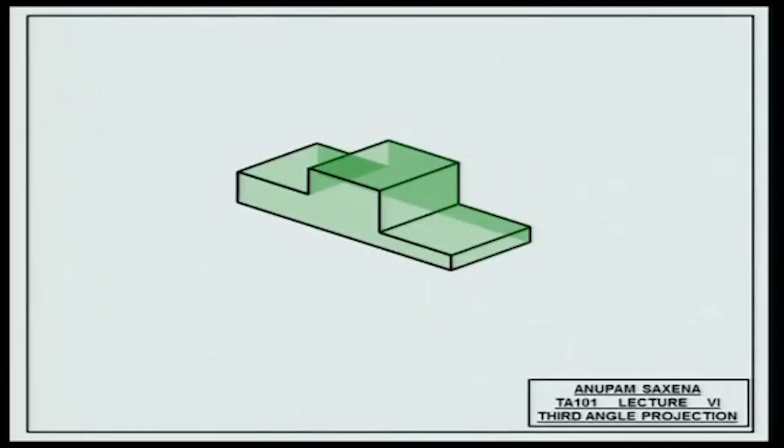Today, I will introduce you to God. Okay? All right, so let's get started. A familiar figure. So let's say I have a plane in front of the object, on the side, and on the top. The rays from the object come out to the plane. You get the front view. Likewise, you get the top view or the plan view, and likewise, you get the right-hand side view, something that you've seen before.

Okay? If you flip open these planes about the hinges, you get the third angle projection, something that you've seen. Your frontal view happens to be in the third quadrant. And I said, well, if you are working with three views, the front view, the top view or the plan view, and the profile view, which is the right-hand side view in this case, and if it so happens that your frontal view happens to be in the third quadrant, it's third angle projection. Okay?

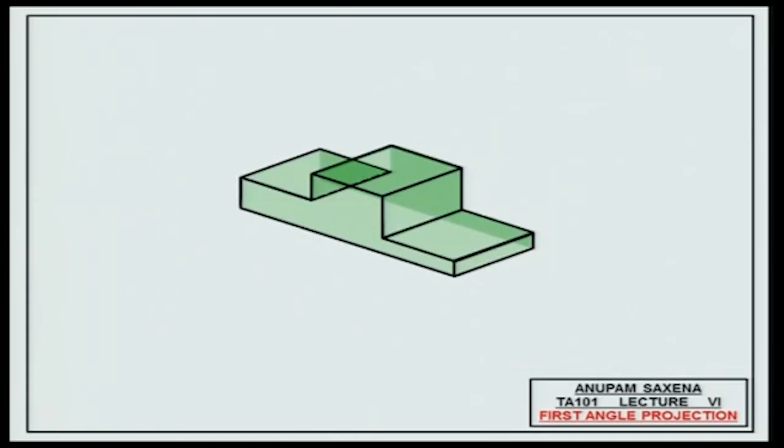Same thing, but in this case now the plane is at the back, bottom, and on the left-hand side. You let the rays emanate from the object and let them fall on these respective planes. Okay, you get the front view here, you get the plan or the top view here, and likewise you get the side view there. Again, if you rearrange these planes, your frontal view happens to be in the first quadrant.

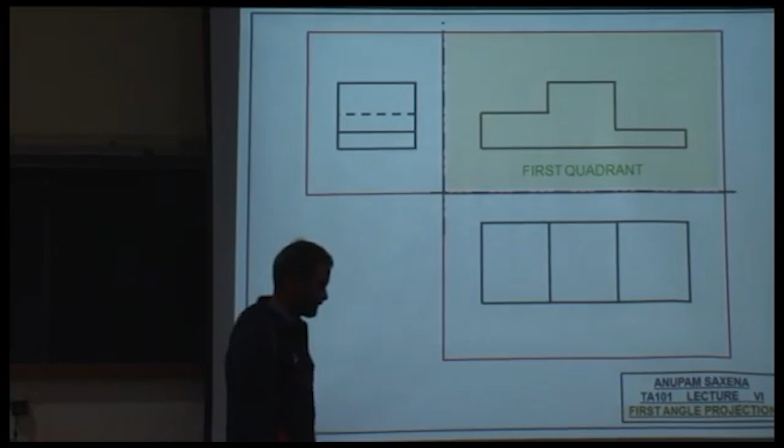Okay, so remember that you're working with three views: frontal, top, and right side view. Right side view, not the left. And then I said that, well, in this case, if your frontal view happens to be in the first quadrant, then this is the first angle projection.

And then my colleague, Professor Kishore, visited me and he was like, well, if I remember correctly, I learnt it slightly differently. And then I had to jog my memory back. Well, back in 91, did I learn the same way or maybe I learnt it differently? And then I said, yeah, possibly I learnt it differently. I had doubts. And so in life, when questions bother you, then you've already seen God, right? Why do you say no to that?

You either refer to your Bible, your text, and just in case you're not used to referring to your Bible, you pray. Okay? You pray to God. You may not be able to connect with the real God, in the sense that you may be speaking to him or her, but you may not be hearing his or her voice back. But this guy will try to come up with an answer. The answer may not be the one that you are looking for, but still, it will try to be as close as possible to the answer that you're looking for. So I did the same. I had doubts.

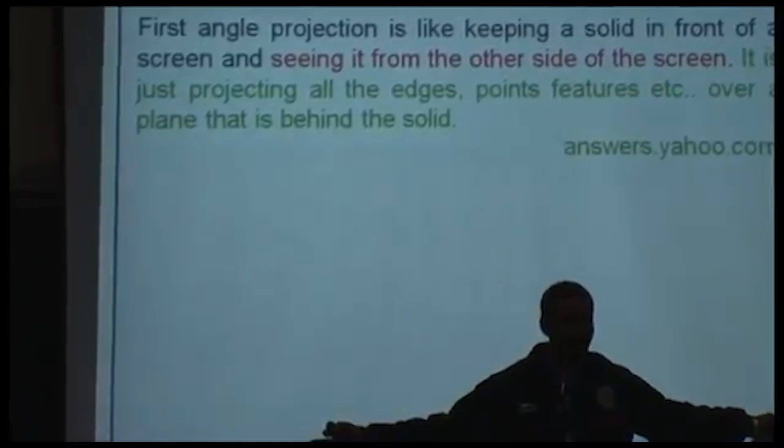Seeing it from the other side of the screen. If I'm standing here, and if an instance of mine, TA101, goes back and looks at myself from behind the screen, what will that instance of mine see? My backside, the mirror image, which is not quite right. Fine. It is just projecting all the edges, points, features, etc. over a plane that is behind the solid, which is something that we have been doing, which is okay.

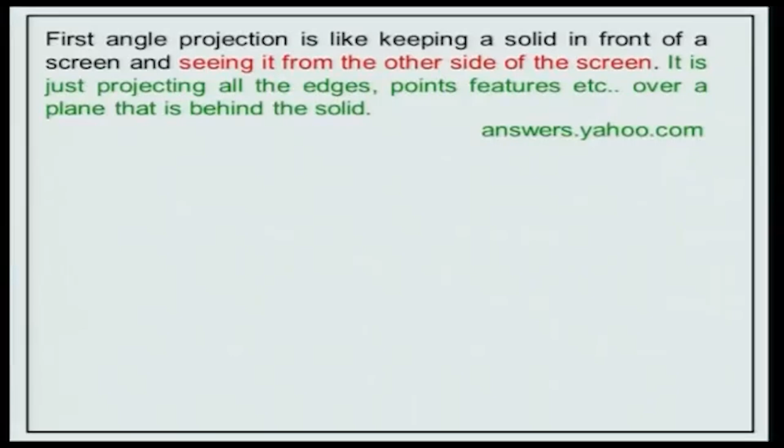But from where do these names, the first angle and the third angle, come from? Not so very clear. So I was not satisfied. Okay? I kept asking God.

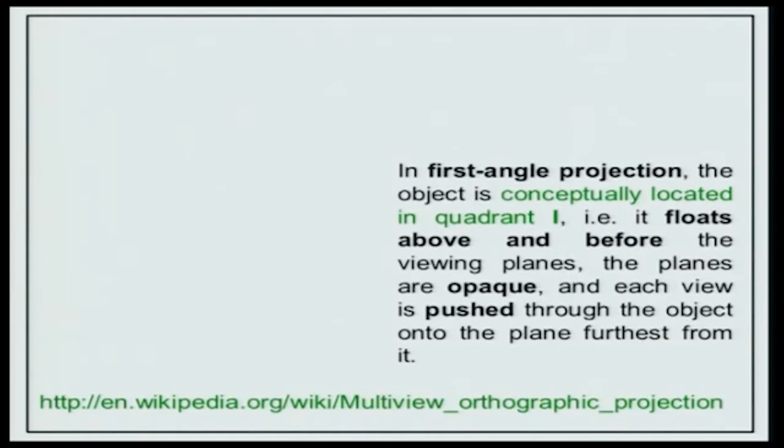And then I got something. In first angle projection, the object is conceptually located in quadrant 1. Now here is where the difference lies. What I told you before was that it was the front view that was located in the first quadrant. But this guy says that it is the object which is located in the first quadrant. Okay? Slight subtle difference.

I.e., it floats above and before the viewing planes. The planes are opaque and each view is pushed through the object onto the plane furthest from it. And then it's talking about the projections. Okay? Same thing that we have been doing. Well, if you're not able to understand the text, it's perfectly fine. I have a graph.

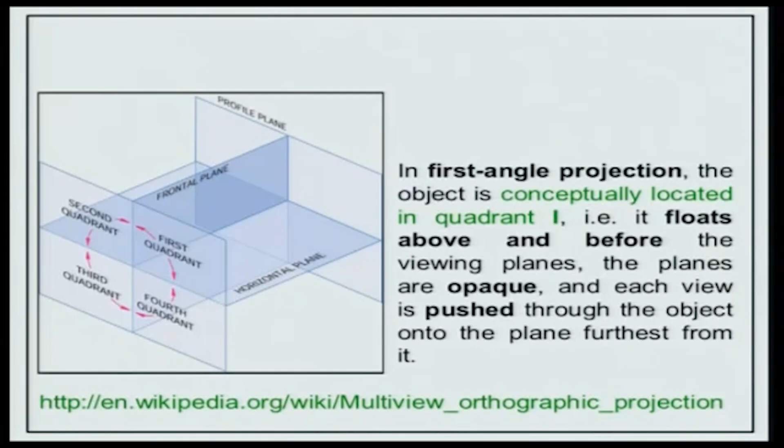Imagine the space divided in 4 quadrants, quadrant 1, 2, 3, and 4. You see the frontal plane, you see the horizontal plane, and you see the profile plane. Okay? Quadrant 1, 2, 3, and 4, frontal plane, horizontal plane, the right-hand side plane, or the profile plane. Okay?

So if you keep this object in quadrant 1, and this is the important point, if you look at this object from the right, this is the important assumption. If you look at this object from the right, that means from here, and if you let the projections emanate from this object and get back onto the frontal plane, what would you get? What would you get?

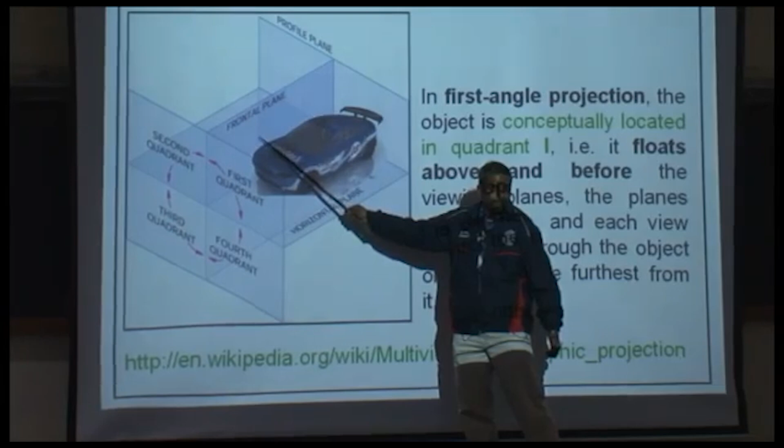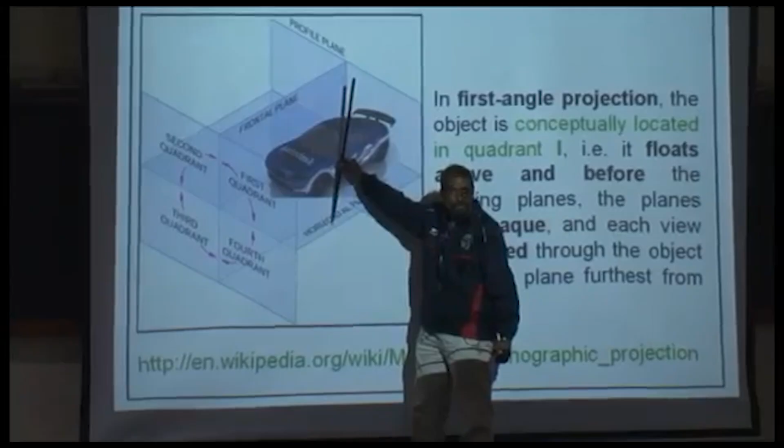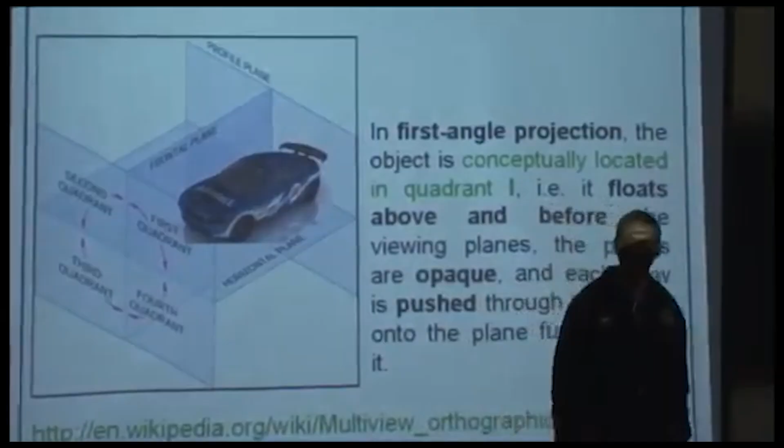Louder. Front view. Likewise, if you let the projections emanate from this object and hit the horizontal plane, flip it over, what will you get? The top view. Okay? And if you let the projections come out of this object, hit the profile plane, what do you get? Which profile? Who said left? Who said right? Which one is right?

Got to be careful. Where are you looking? So, where are you standing with respect to the object? Left hand side or the right hand side? You're standing here. You're standing here. What would you get on this profile plane? Left? Okay? So this is where the nomenclature comes from.

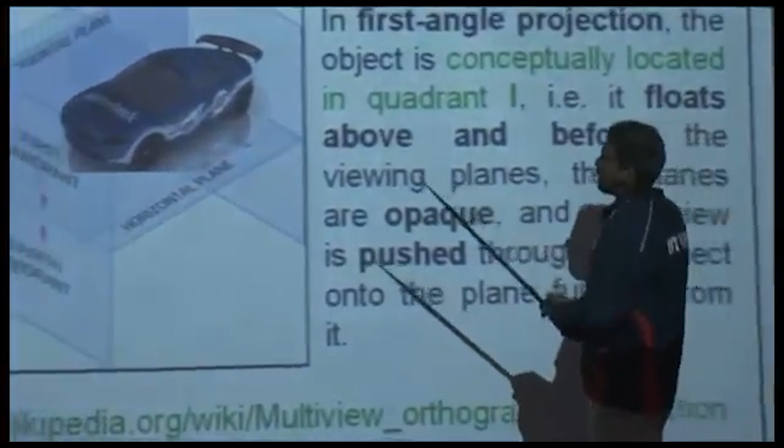Okay? But if you realize, you're smart, if you're in the first quadrant and if you open up the views, you'll be essentially getting the frontal view in the first quadrant. Okay? Similar, subtle difference. One thing that you need to remember again is in this nomenclature, you have to be standing or looking at the object from the right. Okay?

In third angle projection, the object is conceptually located in quadrant 3. Forget the rest of the text. Look at the car. Okay? Once again, you're looking at the object from the right. You're standing here. Okay? But it is this plane which is intercepting your view, in a sense that this plane is in between the object and yourself.

Okay? You do the same exercise, you get the front view, you get the top view or the plan view, and then you get the right-hand side view, flip it open. What you will be getting would be the third angle projection. Once again, in there, if you're looking at 3 views, front, top, and right, FTP, okay? Your frontal view will be in the third quadrant. Okay?

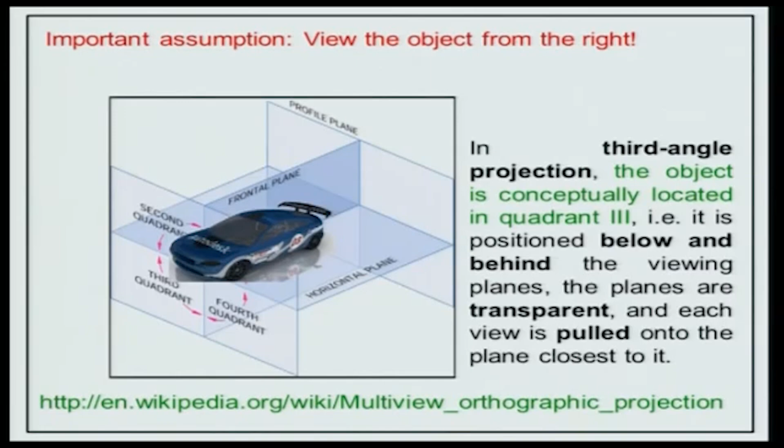All right. There's this anecdote which is again philosophical. But with respect to TA 101, you have to have an eye for the drawing. That comes with practice. That would not come straightforward on a plate for you. It comes with practice. You have to have an eye for the drawing. Okay, if you don't have it, develop it. And that's the reason why I call this course Think and Analyze.

And I encourage you to make mistakes, like I do. I'll tell you about some of my mistakes that I did, which you have absolutely no idea about. Okay? I encourage you to make mistakes because that's how you learn. That's how you develop the eye. You make mistakes, you realize that you have made a mistake, and then you say, well, fine. Next time, when something similar happens, I won't try to repeat the same mistake. Okay? I encourage you to make mistakes and learn from it.

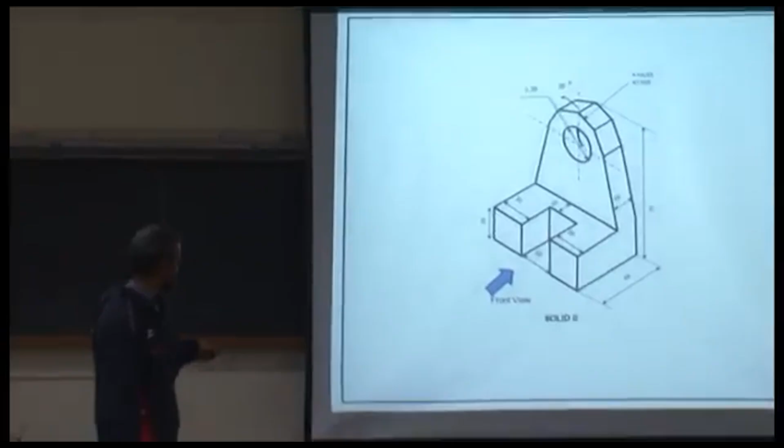For example, you must have done this problem in lab 2. Huh? What is wrong with this? Okay? Even I didn't realize until, what's your name? Shreya. Mentioned that there would be a line here. Okay? There would be a line here. Would there be? Would there not be? Because that represents the line of intersection between 2 planes. The plane at the bottom, the plane here, and the plane here. Do you agree or do you disagree? Agree or disagree? Agree. Good.

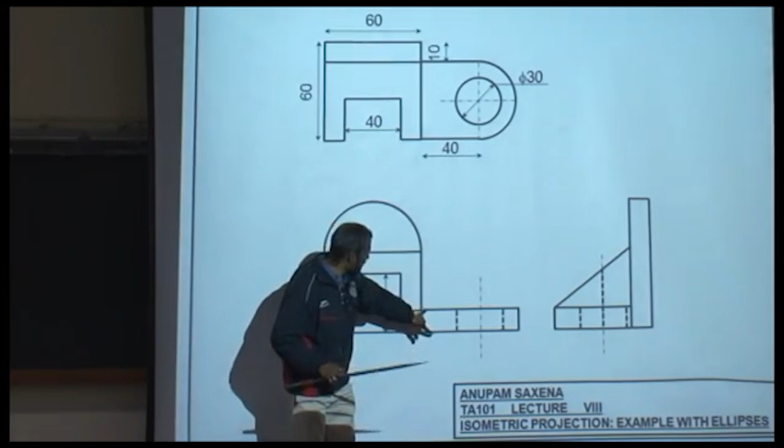Okay, first mistake. This is the problem that you are doing currently. So people in Monday's batch and people in Tuesday's batch, they are working on that. Well, the dimension is not there, so you can assume the dimension to be 10. So for those who have done this problem, they may have assumed this dimension to be 10. For those who don't, take it as 10. But this is not what I'm referring to. I'm referring to something more fundamental, which Ria pointed out to me. She is one of the tutors in Monday's batch, right? Thursday's batch. Okay.

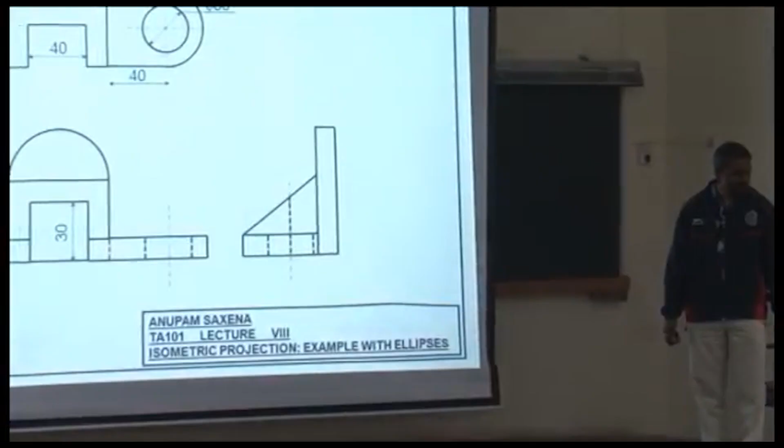Okay, watch carefully. Do you see any mistake in this? You do? What is it? One extra solid line, which is where? Where is it? Front view. This one? No, but this one? Are you referring to this one? Yeah? Any other mistake? Yeah? This line? Should it be there? Should it not be there? Okay? These are subtleties, which are very, very difficult to keep in mind. Okay? It's very easy for us to miss out on these subtleties. Okay?

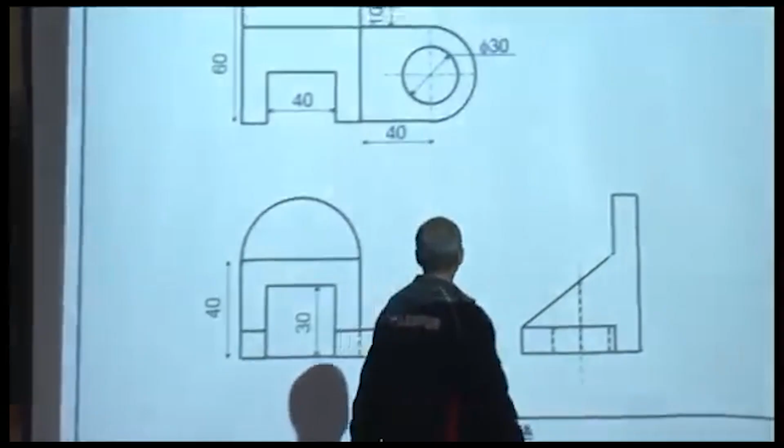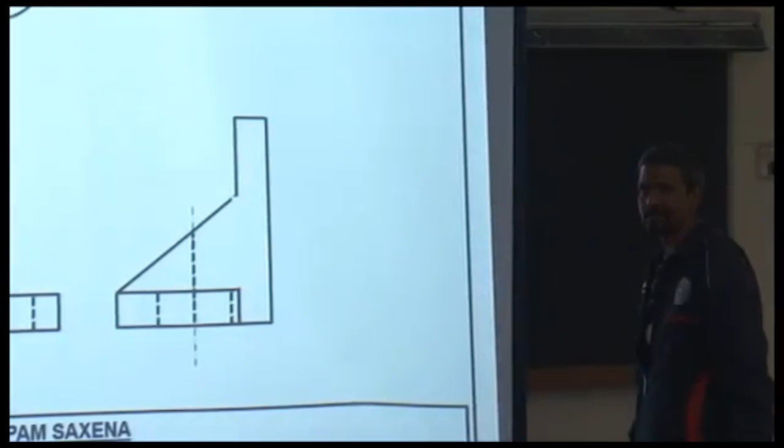Yeah? I guess there is one more mistake. Like those two dotted lines. Which ones? Which are for the circle. Which are for the what? Circle. Yeah, the two dotted lines in the profile. They should be equidistant from the line. This thing should be equidistant from where? It is, no? From here and here. You mean this one? Okay. Okay, so third mistake.

Okay, so the point of emphasis is that you have to develop an eye for the drawing, and I'm so very glad that you are pointing these mistakes out, helping me learn and helping yourself learn. So in this solution, for example, there was a mistake that I realized just today, which is what? Okay, so in the solution that I had discussed in the previous class, I had shown this line. Okay, this line would not be there. Okay? So there was this discrepancy.

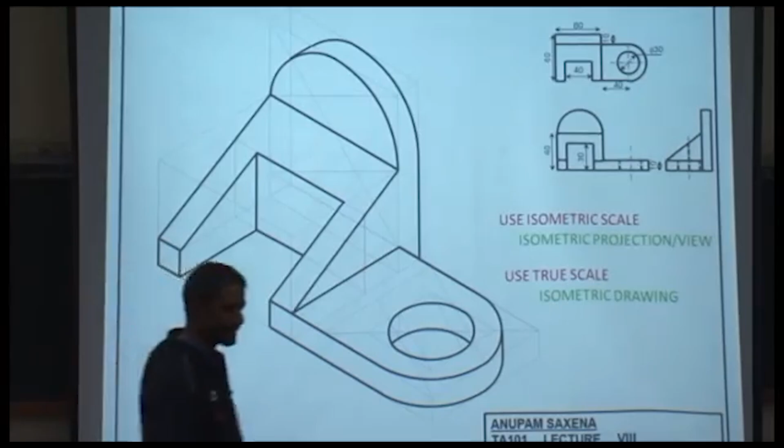I may have said something else in class, and you guys, when you're doing the lab, you probably read the question slightly differently. So let me clarify that when I ask you to use isometric scale, I would do that when I ask you to work with isometric projection or view. Okay? So isometric scale is something that you need to be using when you're drawing isometric projection or view. But you're going to be using the true scale when you're drawing the isometric drawing. I probably may have said it the other way around in this class last time, right? Yeah? Okay. So today it's about missing lines and views to help you develop an eye for the drawing.

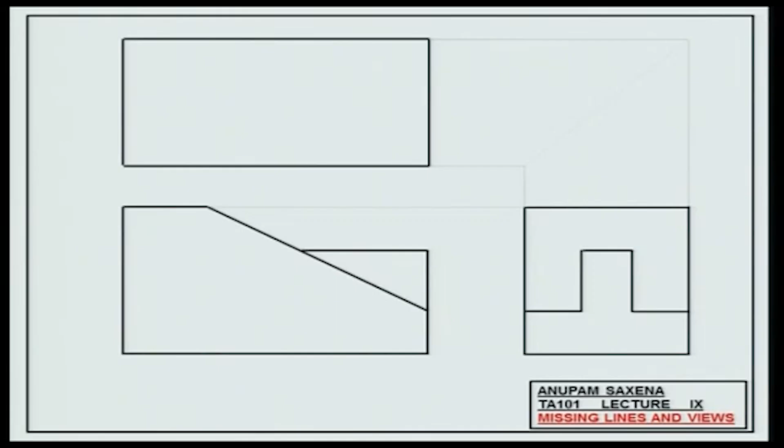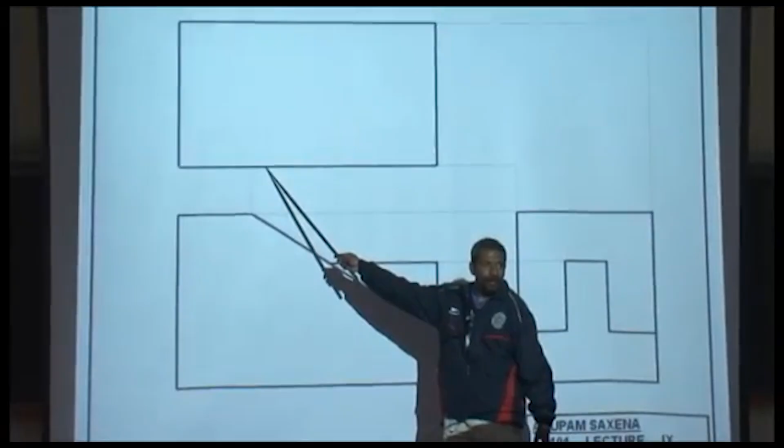Let me quickly draw the basic projection or construction lines. Okay. Now, I'm trying to rectify these drawings. I look at this point here. Okay, intersection of two lines, I look at this point here. If I project this point onto the plan view or top view, I'll see something. And if I project this point onto the right hand side view, I'll see something. Okay.

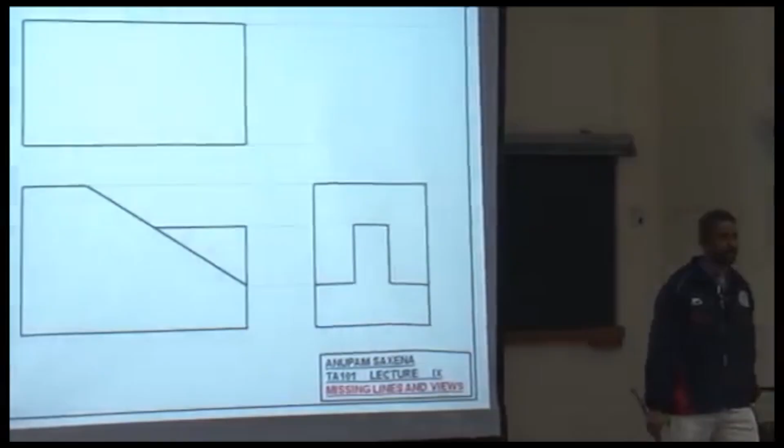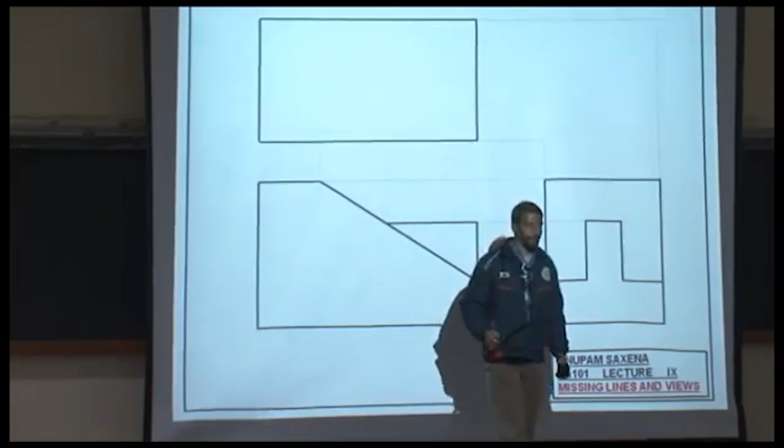Now, if I have a point in one of the views, what would I see in the other two views? Lines? And are they going to be perpendicular to the hinge lines, or parallel to the hinge lines? They'll be perpendicular to the hinge lines. I take a look at this point, I project this thing upwards, I take a look at the corresponding image of this point over there, which is a line in the right hand side view. So what do I expect there in the top view? Straight line, horizontal, vertical, slanted? Good.

Simple exercise of correlating different features in different views, which you would soon realize is not that simple. So I want you guys to be with me and glue your eyes onto the screen. One eye to me, the other one to the screen.

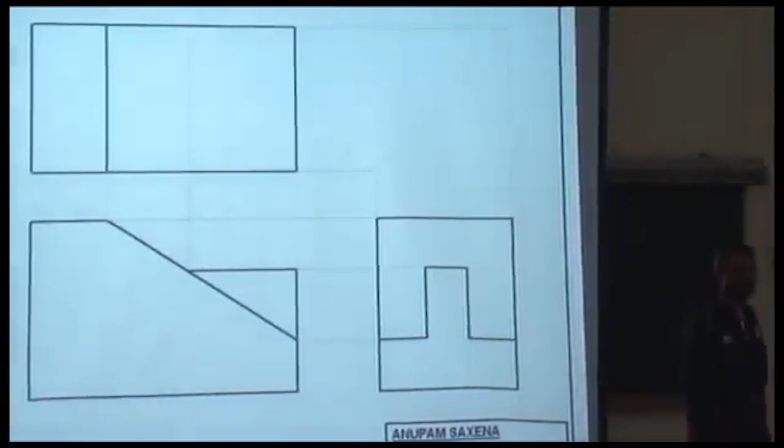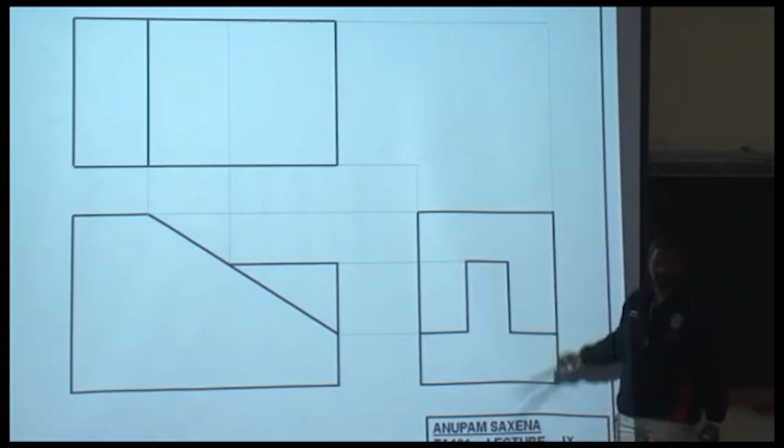How about this point here? What do I expect to see? Just a portion of the vertical line. I expect to see only a portion of the vertical line. Why is that? Because if I took a look at the image of this point in this view, I see only a portion of this line, not the entire line. So I project this line upwards onto the top view, and then I get this. Good enough?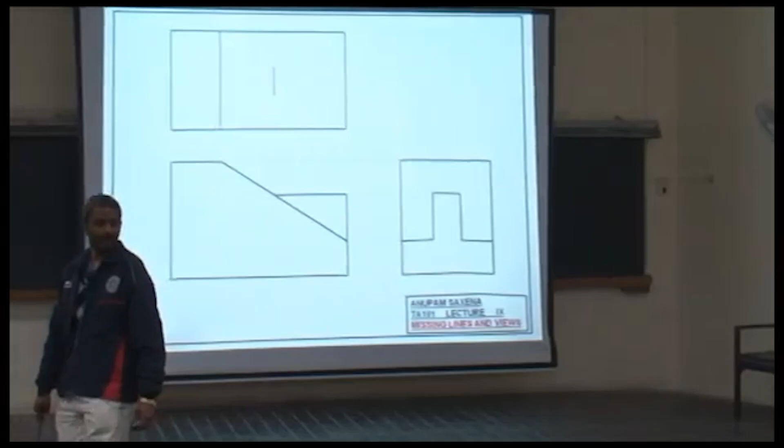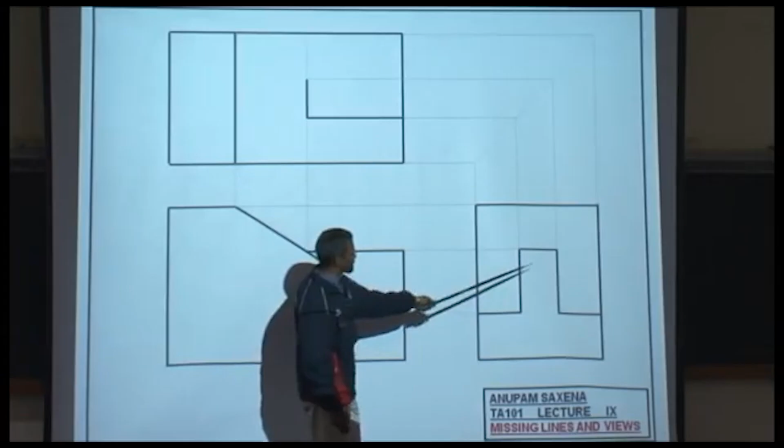Okay, what do you propose? I'm not done yet. I'm not saying that this set of figures is complete now. Now, look at this point here. Image of this point in this view is a horizontal line. What do you expect? Look at this point here. Image of this point in this view is again a horizontal line. What do you expect there? Am I done yet? Would I see a line here?

Done? How would my object look like? Can you figure? Not straightforward? We basically have to assume that basic lines are only in the top view, because otherwise we would think of many more configurations. I'll come to that. Possibly, if you sketch it out, your object will look like this. Agreed? Okay. Still thinking?

Okay. Example 2. Let me quickly draw these construction lines. I'm not showing these construction lines because they are quite obvious. So the idea is you look at the three views, you look hard, you look harder, and then you try to figure which of the features in which of the views are not related. For example, this point here, you don't see the corresponding image in the front view or possibly in the side view.

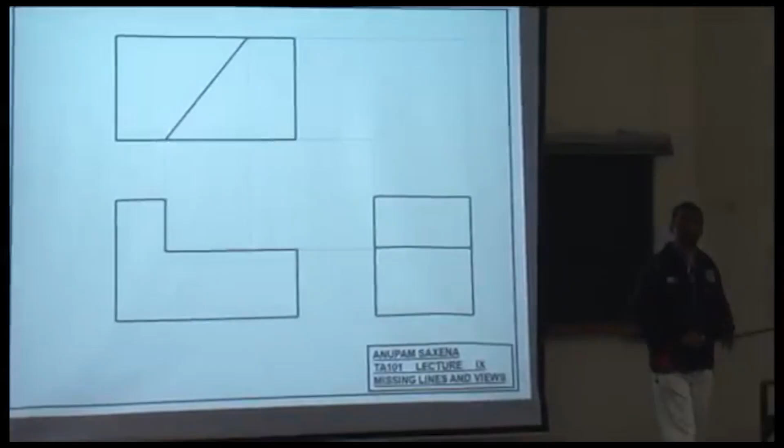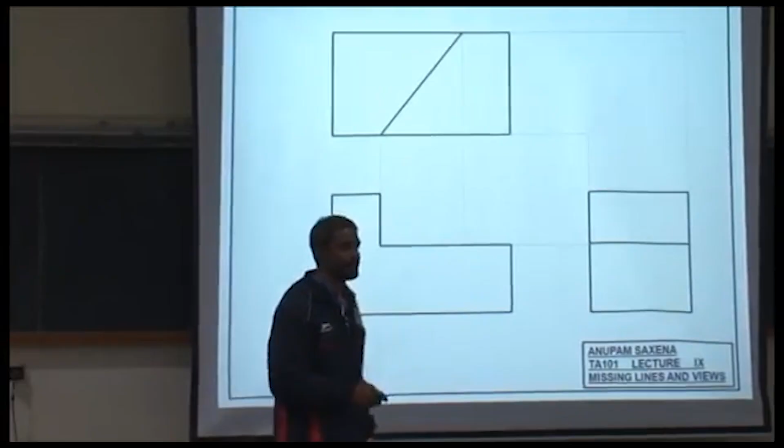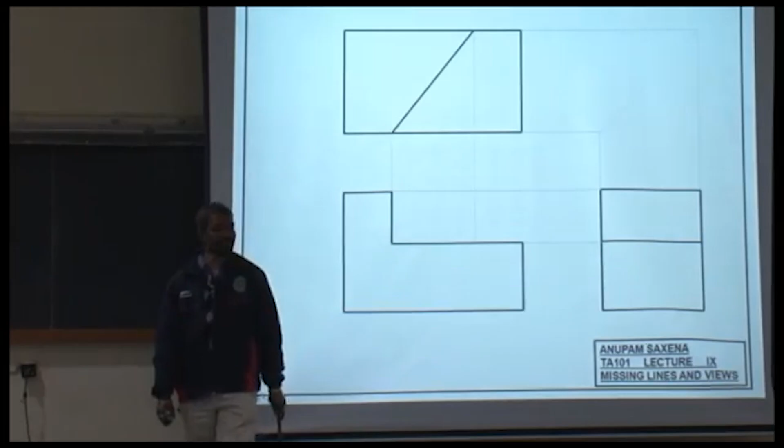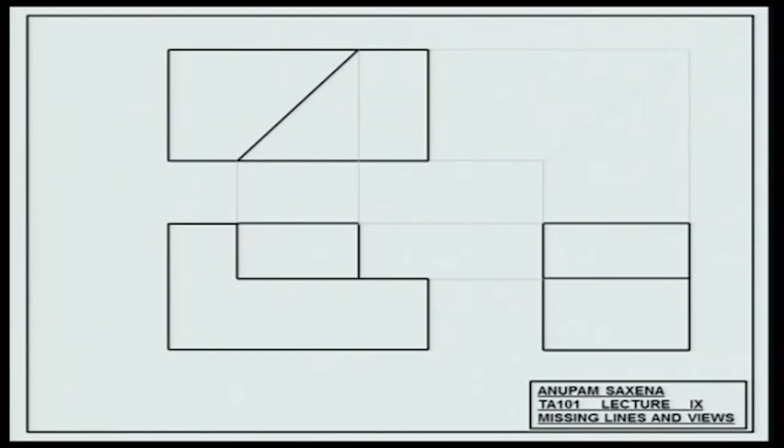So what do you expect here? No. So let's break it down. Lines and rectangles. What do you actually expect here? A line? Horizontal, vertical? This is a slant line here. The image of this slant line here would be horizontal? Convinced? Always? Not always. But in this case, maybe it is. So you see a vertical line, and you would see a horizontal line. Rectangle, some of you had mentioned that. Is that it? This is how the object is going to look like.

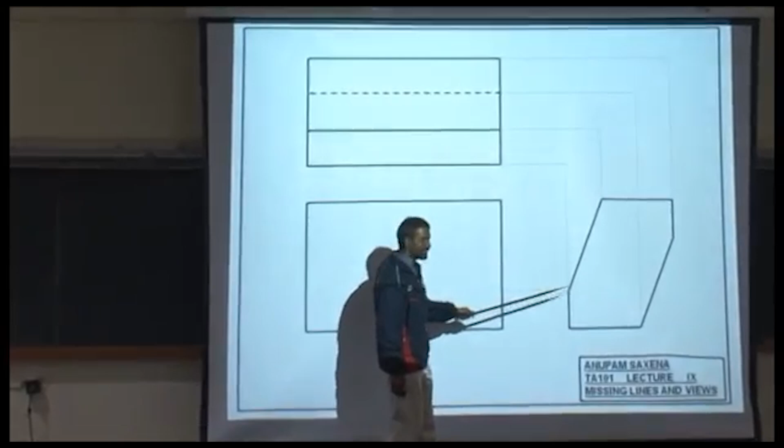This one. Let me quickly draw projection lines again, construction lines. This feature here is related to this point on the right side view. This dotted line in the top view is related to this point here at the bottom. So far so good, no changes in the three views. How about this guy? A point, image of which would be a horizontal line here. Go up, you only see a horizontal line here.

This would be a solid line. How about this guy here? Dotted line. Is that it? This is how your solid is going to look like in pictorial view, pictorial sketch. So try to realize what I'm trying to do here. I'm just working with the three views given to me, and I'm trying to correlate different features in different views with other views. Okay?

And then once I figure that, okay, fine, I cannot go any further from there, and I assume that the three views that I have constructed are okay and are correct, then I attempt to sketch this three-dimensional solid. But this approach is not always applicable, as in this approach will not always work. You will have to draw the pictorial view as and when you are making revisions to your orthographic views.

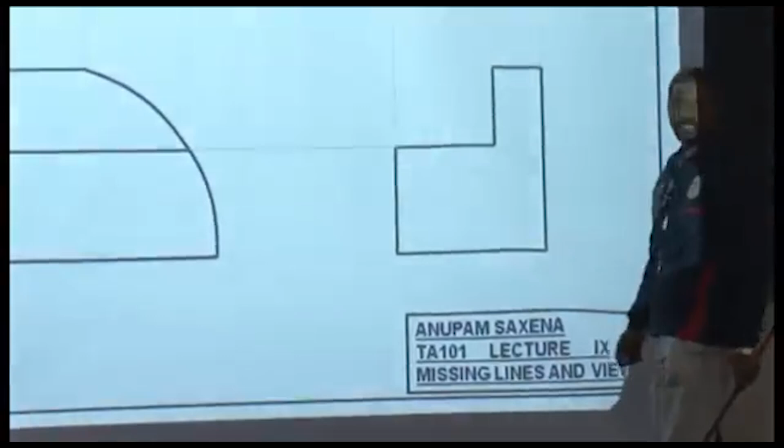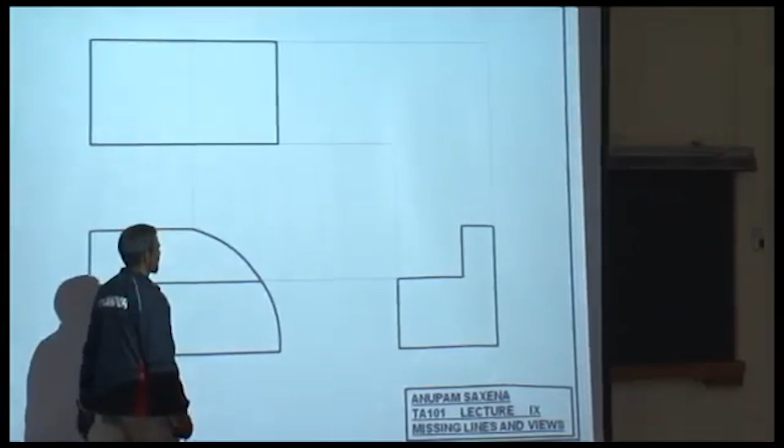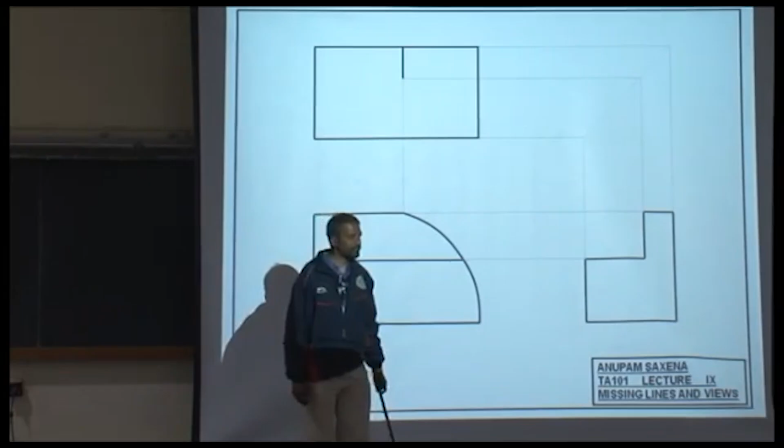A part of it would be a line. A part of this vertical line would be a line. Which part? Okay, I go from the right. Okay, this part would be a line. What else? There would be a horizontal line. And this would correspond to what? So you're suggesting that there would be a horizontal line here. And this would be the image of which feature in this view? This arc? Okay. Complete horizontal line?

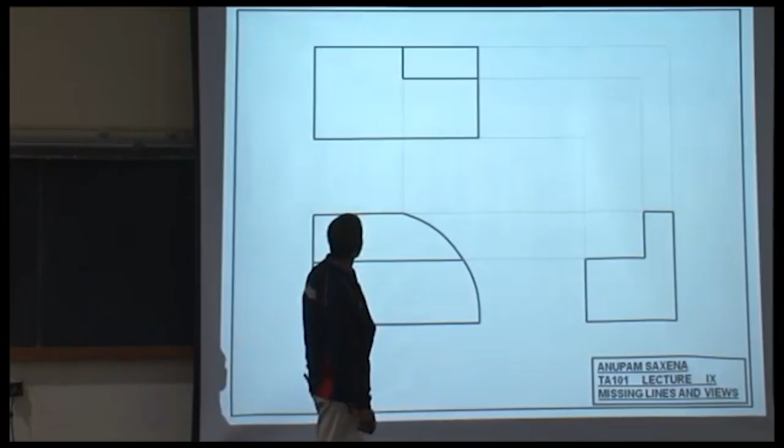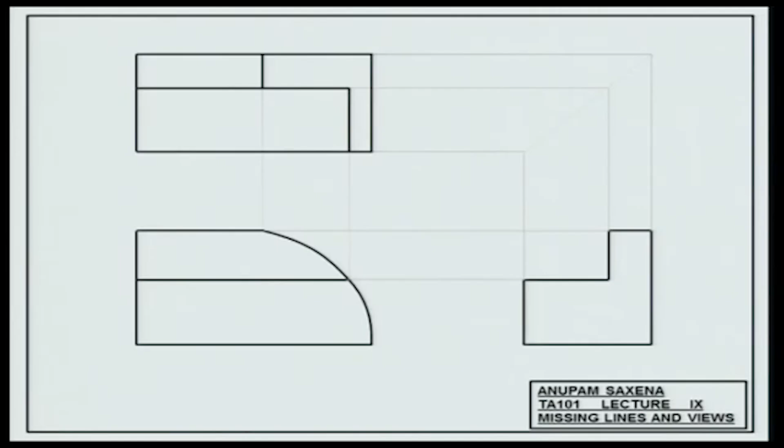Hold on. Okay. Let me address this point here. Okay, so this is the intersection point here. Would there be a vertical line? Yeah? Yes or no? Okay. Would this part of the line be there? Okay. And then somebody says that there would be a horizontal line. Yeah? Is this how your solid is going to look like? Small mistake. Okay. Where?

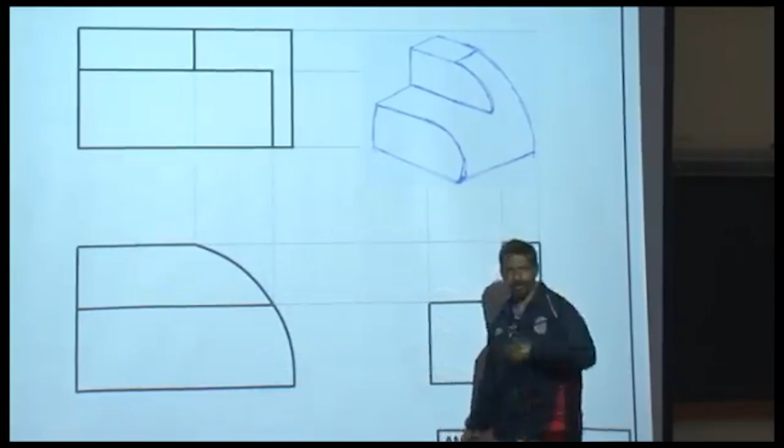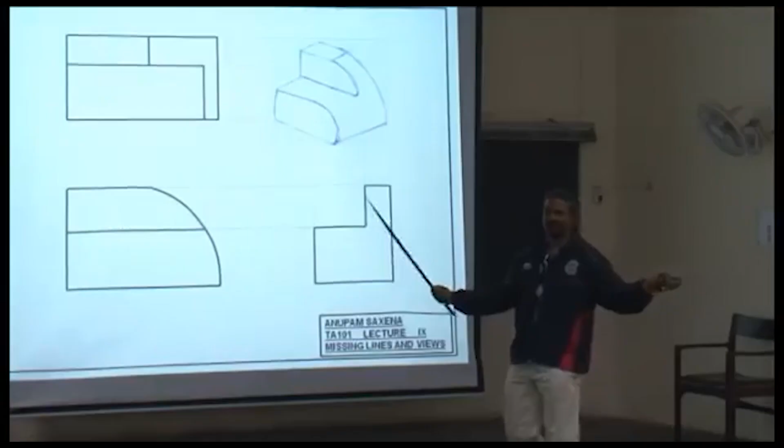It's there. This one. This. Can you come up? Avikalp suggests that there should be a line here. You sure are thinking, you sure are analyzing, and I'm very happy about that, which is what I want you guys to do. Okay? Those who say no, raise your hands. And can somebody stand up and tell me why?

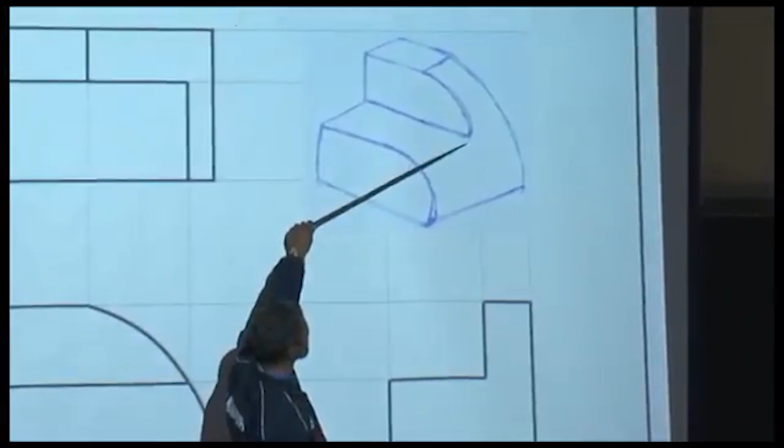It's like there's a half slot, there's a sheet extended over it, and a part broken and taken over. It's like a smooth curvature. There's no region of discontinuity in surface. So you say that it appears to be like that. Who says yes? Okay.

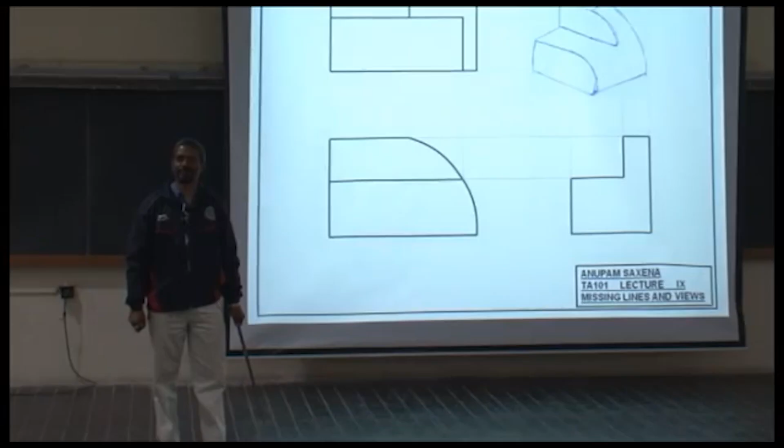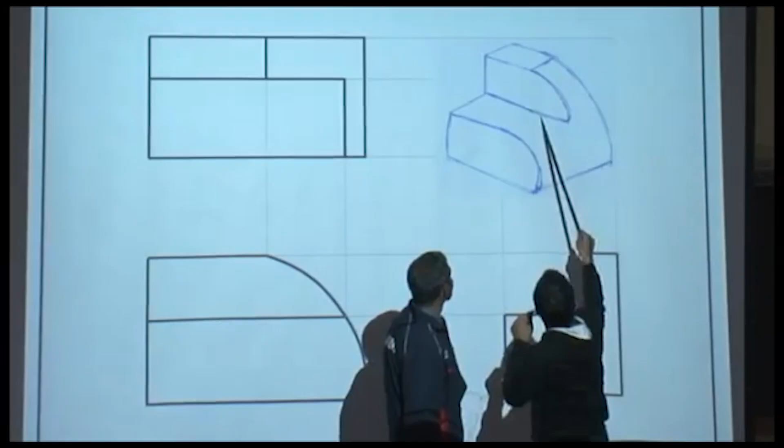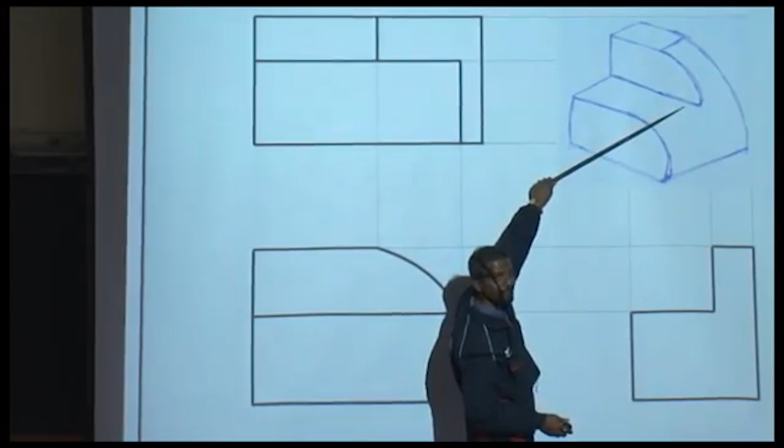Come up. So this line is here, so there should be a line here. That's what he says. Since there is a line here, there should be a line here. Did I get it right? Okay. Is he right? Is he correct? Yes. What is this line signifying? Line of intersection between two surfaces. Which ones? This plane here and this guy here. Right? So if there is a line here, would there be a line here? Yes. Okay.

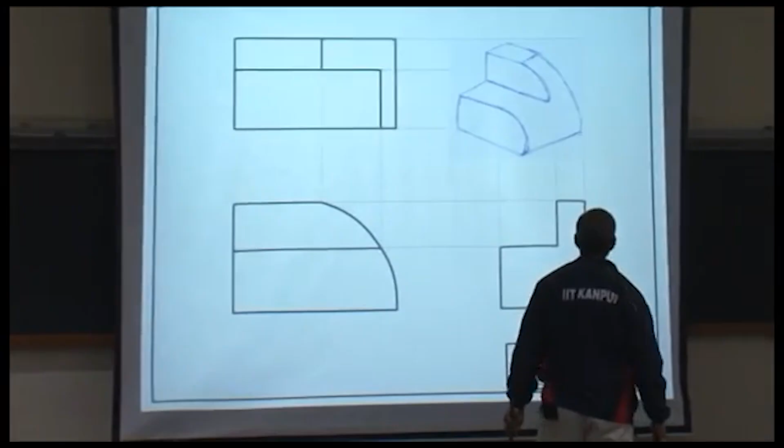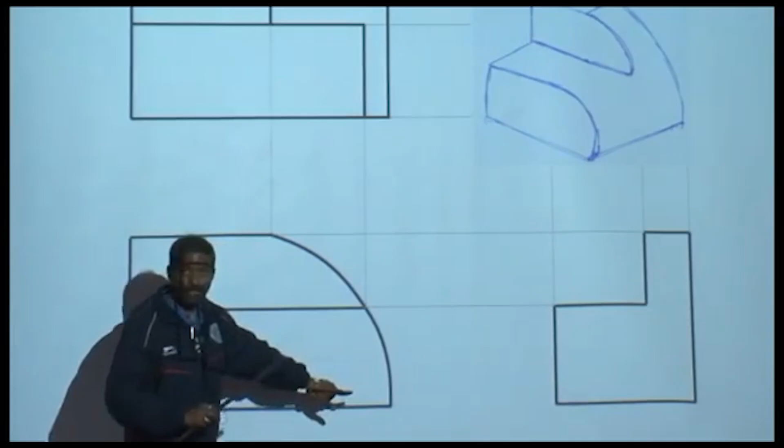Who disagrees? Good. Yeah. From here to here. So there are two parts. One part is getting truncated over here, corresponding to which there would be a line here. The other part is going straight out and it's getting truncated over here. So this arc, folks, try to understand this. This arc emanates from here, gets truncated here, goes flat, and that constitutes this horizontal surface. Other part of it goes up over here, gets truncated over here, and that corresponds to this plane here. So there would be a line here.

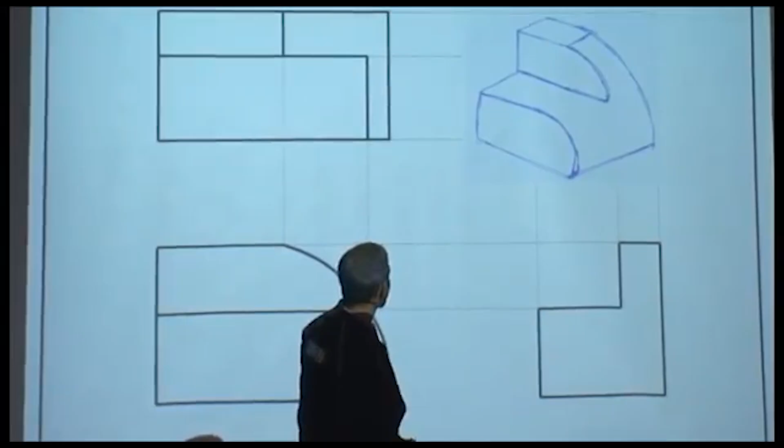So that should not be smooth. Sir, you have made it smooth. I am allowed to make mistakes. If I do not make mistakes, many of you guys will be dozing off by now. The fact that I make mistakes keeps you guys vigilant and active. Right or wrong?

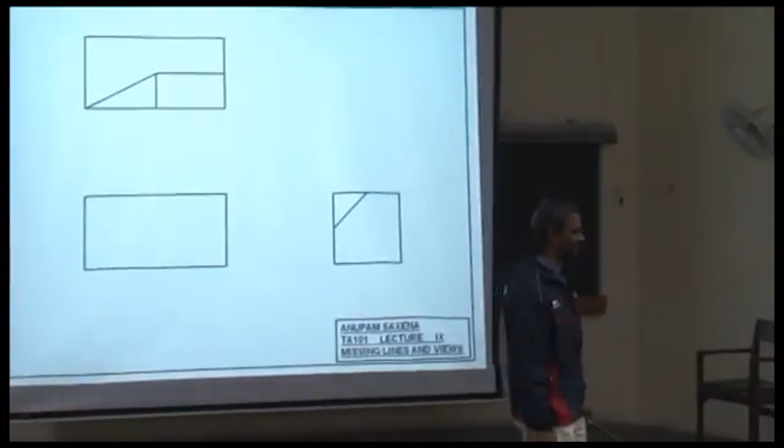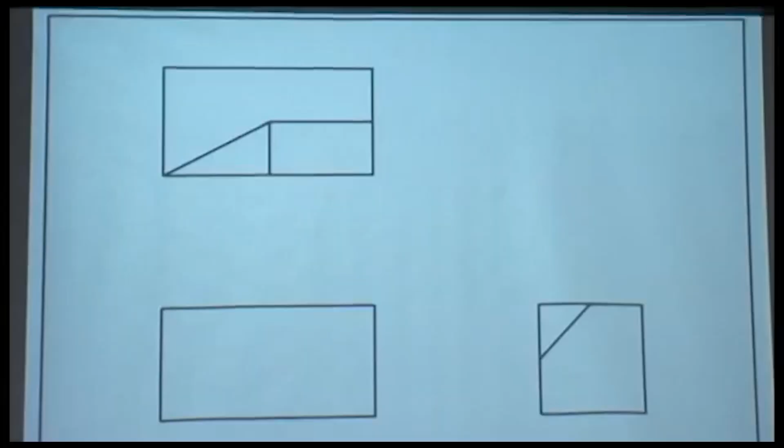Okay. This is tricky. And what's your name? Yeah. Chirag. Your question will be answered now. This is an example where just correlating different features and different views will not help. You will have to draw the pictorial view of the object. I'll need some more time. I'll need about 10-15 minutes. Okay?

Now, this is what we'll do. I won't say anything from now. Okay? You'll just see a line, either a gray line or a dark line on your screen, and you have to say yes or no. Okay? Here it goes. Yes or no? Okay, assuming that's a yes. Assuming that it's a yes.

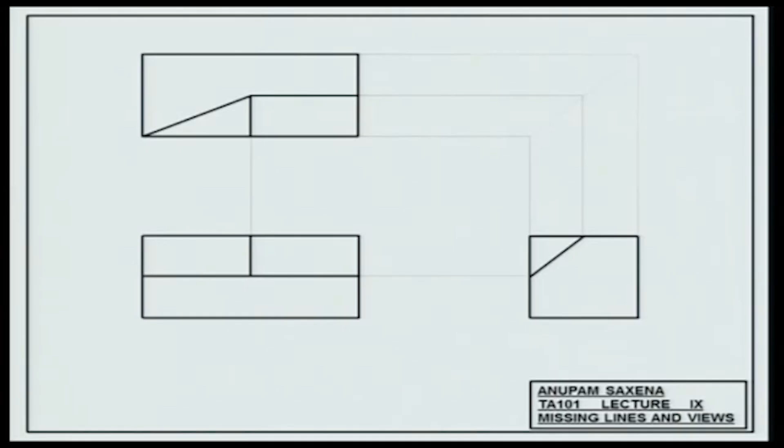Okay? If this is a yes, then these two lines are possibilities. If these two lines are possibilities, then this is how your solid will look like. Okay? Let me retract these steps.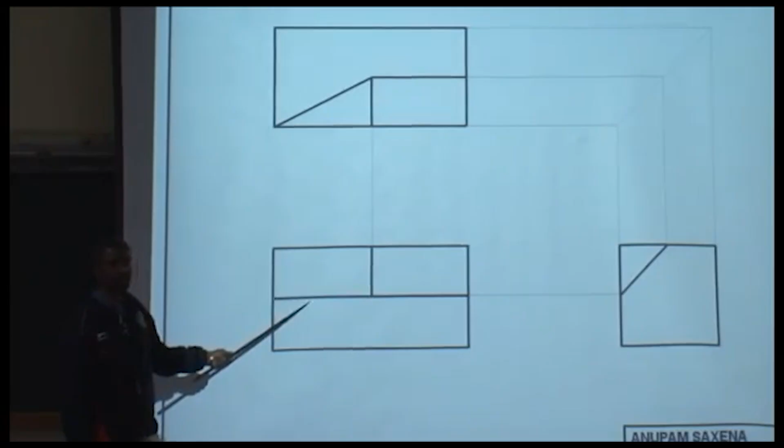Chirag and others. Line number 1. Line number 2. Line number 3. If I draw these 3 lines, I get to see a solid which looks like this. Okay? However, if I draw this line instead, then I do not need these 2 hidden lines, in which case the solid is going to look like this.

Okay? In case 1, I had to work with 3 lines. In the second case, I can just work with 1 line. So there are multiple possibilities. But the understanding is that you have to work with minimum possible number of lines. This is what the understanding is. There's one more possibility with the same number of lines. Okay?

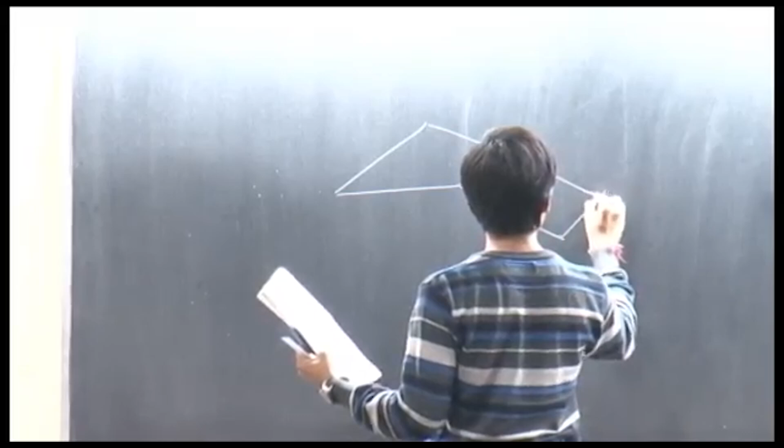Hop up. Avikalp has another vikalp. Huh? No, all 3 should be complete. What is given to you is okay, but again, all 3 projections should be complete, assuming that the 3 projections are uniquely representing a solid. And how do we know? You have to develop an eye.

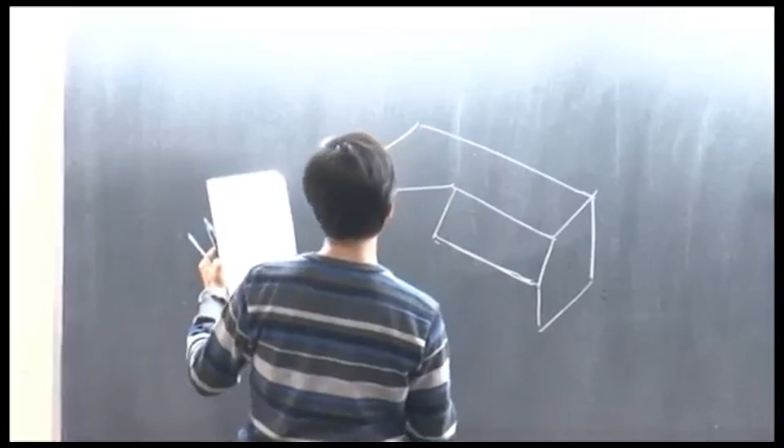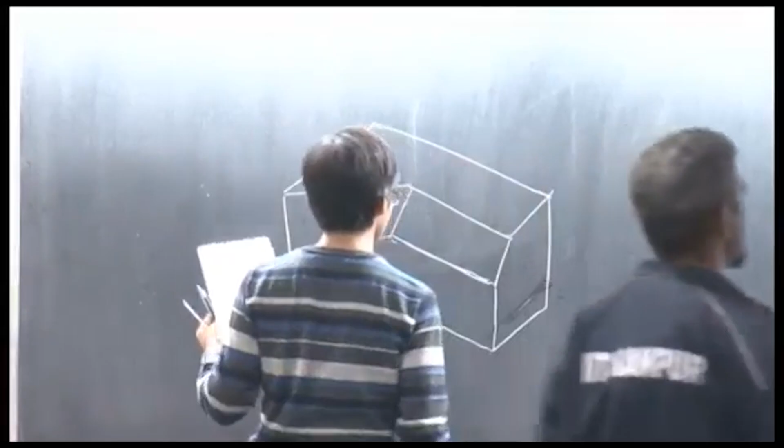Minimum possible lines are to be introduced. This is the unsaid understanding, unsaid statement. Theoretically, I can introduce a square here, a square there, and I get a block. I can do that as many number of times as possible. Nobody stops me from doing that. But then I'm not looking at multiple possibilities.

Folks, guys in the CSE, there are two things happening in parallel. One is Avikalp is sharing another Vikalp with you, and second is I'm speaking with Anshuman. And I want you guys to be polite and patient. Okay, so can you take a seat?

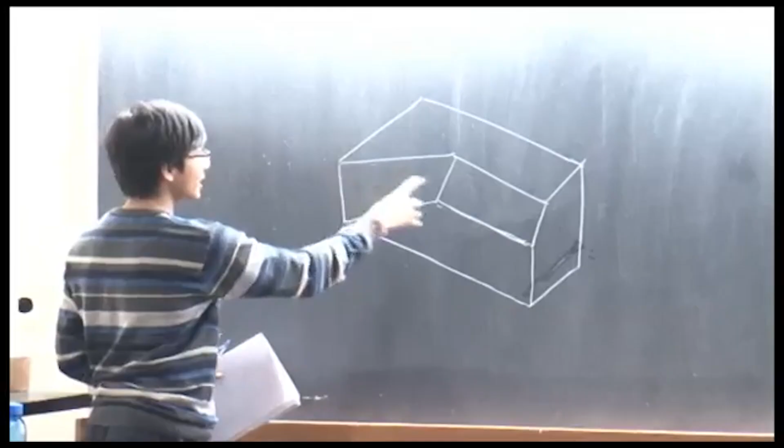This is a curved plane. It starts vertically and ends diagonally. To address Anshuman and the rest of you, once again, the unstated understanding is you have to work with minimum number of lines adequate enough to complete all the three views. Okay?

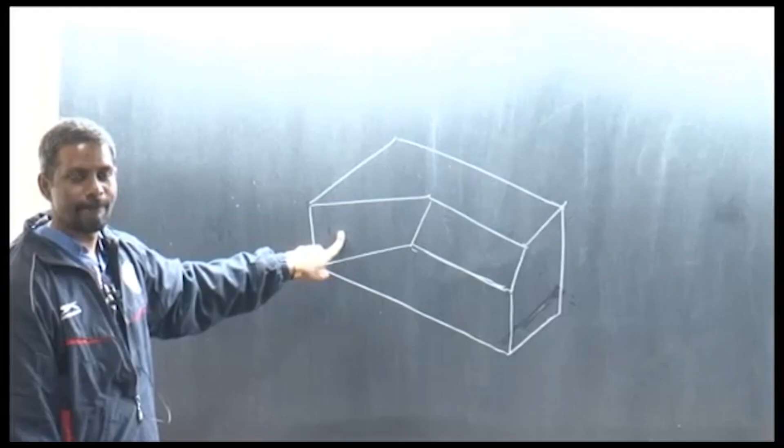And to address another Vikalp of Avikalp, this is a plane defined by 4 points which are coplanar or not? They are not coplanar. A plane is defined by 3 points. It's a warped plane. Twisted. It's warped. That is something which is not allowed.

So something that you need to keep in mind: try to avoid these possibilities, because this is a plane which Avikalp says is warped. These 4 points do not lie on the same plane. It makes sense because it's 3 points that define a plane uniquely. What was the principle? There shouldn't be a line dividing the square and the rectangle if they are in the same plane. If they are not in the same plane, then we have to draw a line.

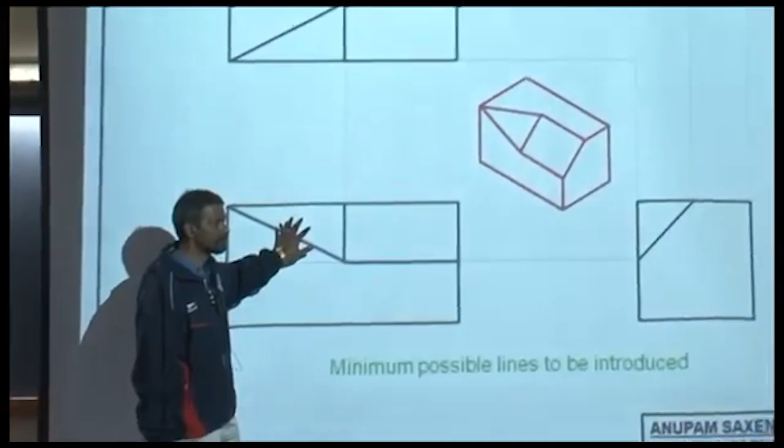Regarding the solution, sir, can you explain to me in what depth of the... Okay, so Kevin, are you guys with me so far? Who's not with me so far? Everybody with me? Good. I'll answer this question later after class. Let me proceed.

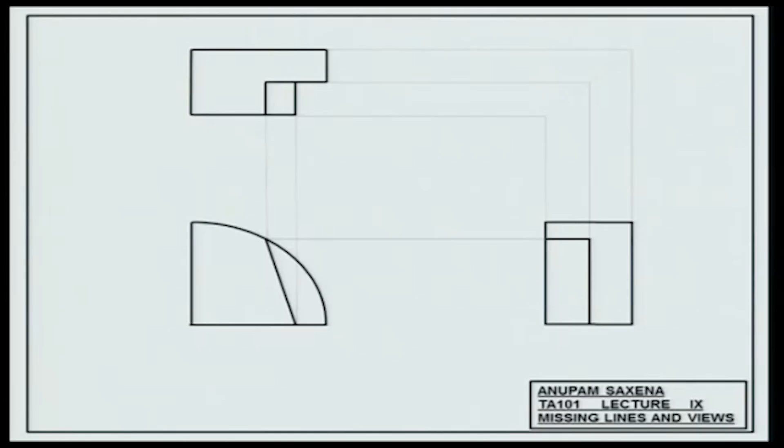It does help if you are drawing the pictorial view of the object alongside when you are in the process of correcting the 3 orthographic views. This one. Once again, I'll start drawing. All you need to do is give your consent or your dissent. Say yes or no. Try to figure out the object later on. This one is quite straightforward. You have been given the front view, 2 squares as the top and the right.

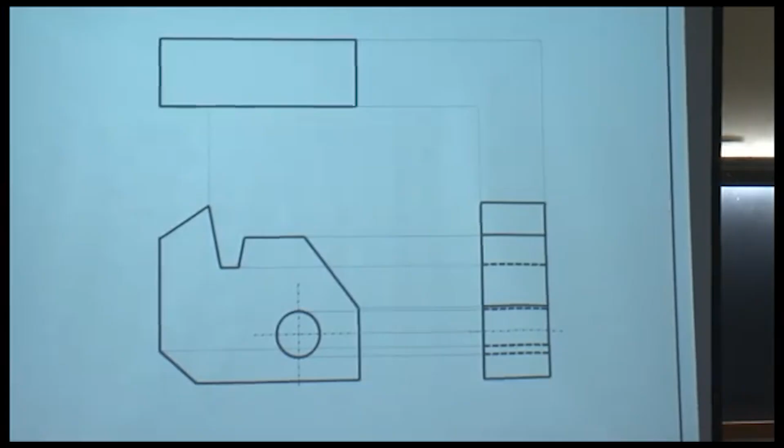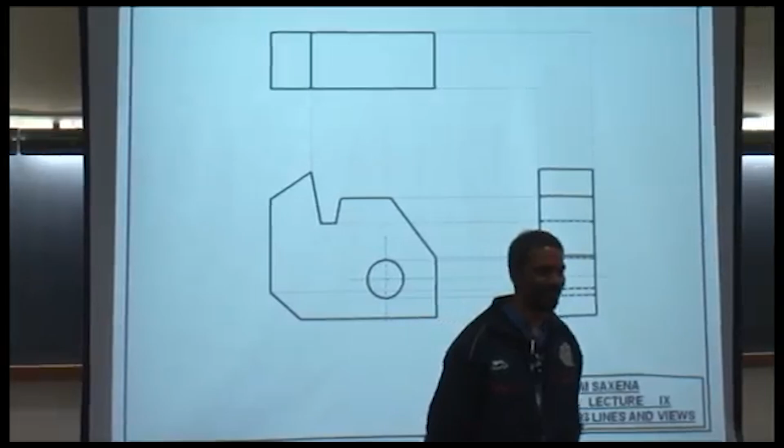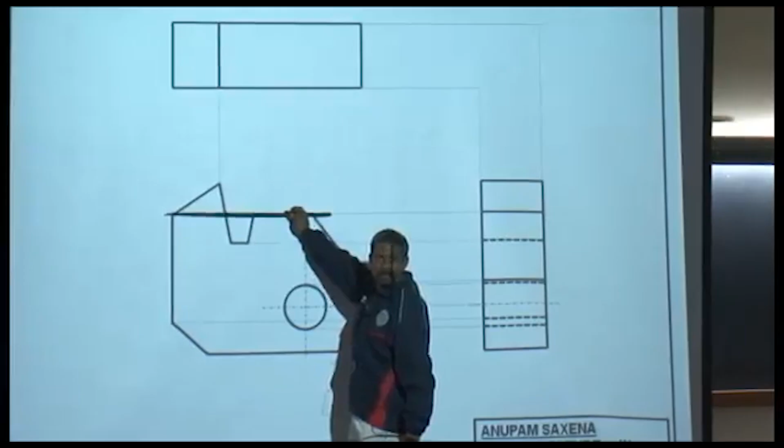Don't think loudly. Just say yes or no. Stay with me. Yes? Solid, hidden. What are you saying? I'm not with you. What are you saying again? If that is not in the same line, that left corner and that part have a line. This thing? Okay. All right. So are you with me?

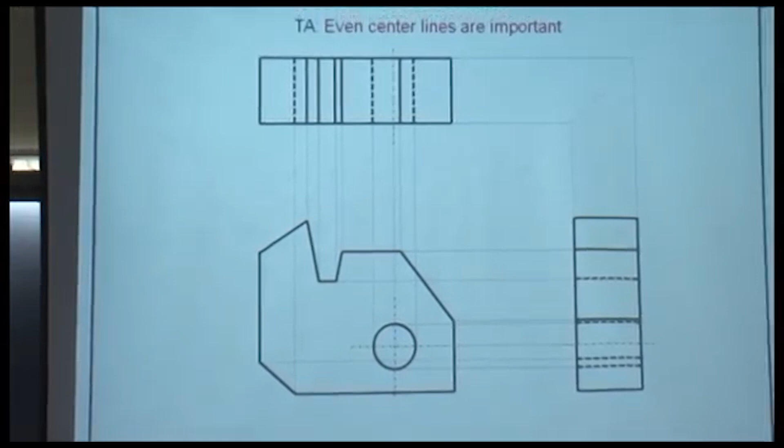Center line? Done? Do not miss out on even the center lines when you're completing your views. This example is there on the web page, so if you want, you can take a look. Okay? So I'm done. Thank you.